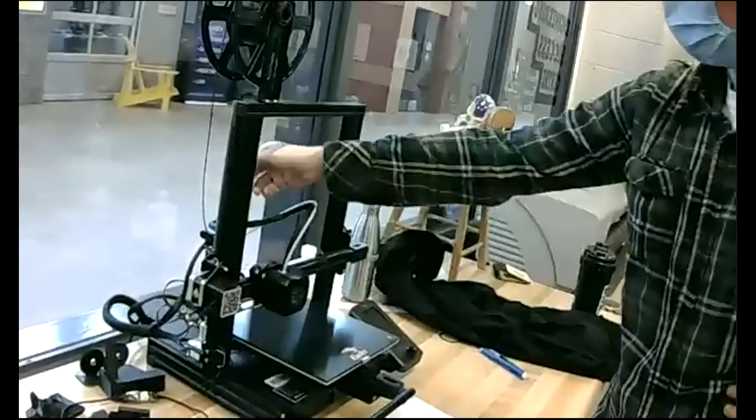You have your X, Z, and Y motors in back, and then you have your extruder motor, which just does nothing but push filament through this piece here, which gets hot, the little nozzle at the end. That's the main breakdown of the printer, really. Besides, this is your print surface. This is where everything will start, and it needs to be particularly clean.

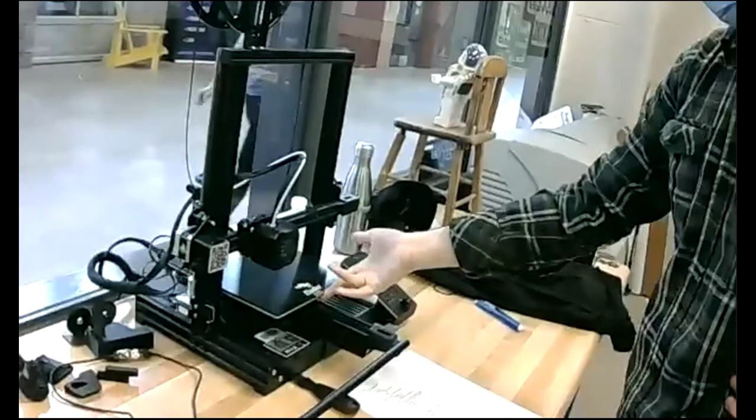So you can't do this. Don't do that, because any grease or any dirt that gets on that bed will basically make your prints not adhere to it and make it really hard to do anything. Your printer has 2 methods of inputting data onto it. You can either use a small SD card or USB to put data onto the printer, so you can put your files on it, print them.

And I guess from there we'll go into how to start it up. On the back of this printer, you have your main power switch right near the power cable. And I'm gonna show this here. Then you have your control right here. This is basically the only information the printer will provide you, and it only has 1 dial and a button.

In here you have your 4 main options: print, prepare, control, and info. Info just tells you the current model of the printer, the firmware, everything like that. Control allows you to specifically adjust the heat of the bed, the heat of the nozzle, how fast the extruder is extruding, all of the really fine-tuned stuff that you generally don't have to worry about.

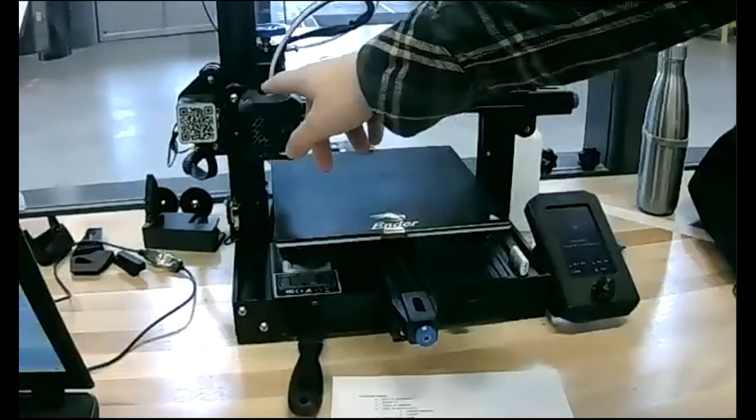And prepare allows you to do things like disable the steppers, digitally move all of the pieces, so you can move it forwards in the Y or in the X or Z. You can auto home the printer, which will bring all of the components to their limit switches. Both X, Y, and Z all have small limit switches here, which basically define the outside of the bed. So it won't attempt to print outside of hitting those limit switches and a certain distance from them.

Now, you can also do your preheating for different plastics here, your cool downs. You'll need to do that for adding or removing filament, and I'll show you how to do that soon. Down here, there is your current temperature, 21 degrees Celsius, just room temperature, which is followed by your target temperature, which is where it is trying to reach. That is both for the nozzle and for the bed.

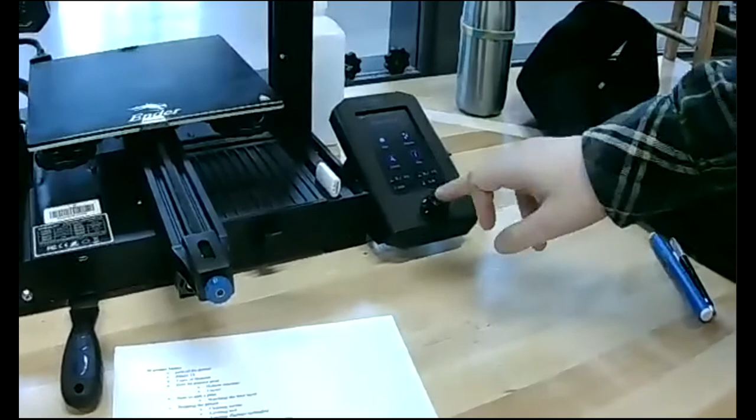You have your current speed. You can turn the speed up and down, and the Z offset. So sometimes you may want it to start printing at a certain offset if you're continuing a print or something like that. In terms of turning a print on to start a print after you've done all of the modeling and slicing, it's as easy as just selecting print, choosing whichever file you have from your SD card or USB, and hitting start. After that, it will start printing, and all you have to do is watch it to make sure it's not going to fail.

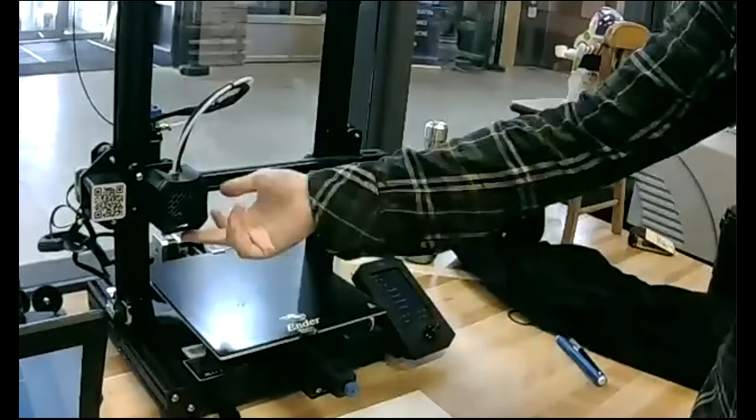So your main issues you're going to run into when printing something, the main issue in general is it's not going to adhere to the bed, which means it's going to attempt to extrude plastic from this tiny nozzle here as close to this bed as possible, and it's just going to not stick. It's going to slosh around. You're going to end up with a whole bunch of just wasted plastic all over the place, and it's a fire hazard. So that's caused by mostly two issues. One is your bed is dirty because you've been touching it, or it's not level.

So down here, you have these little wheels. There's one on each corner, and they are connected to springs. Those are used to level the bed, so you can turn one of these up or down, and it will adjust the angle and canter of the bed.

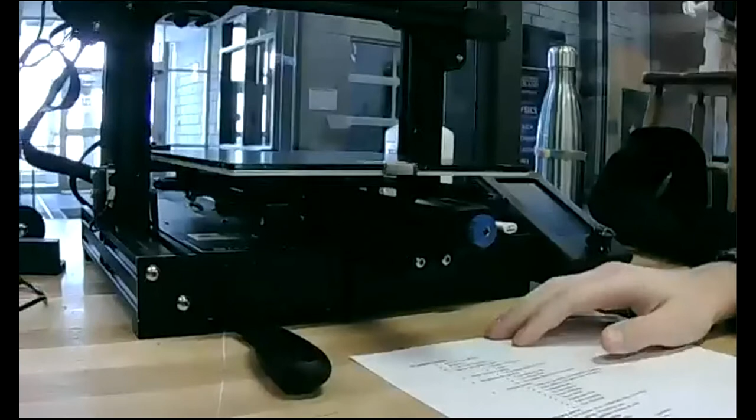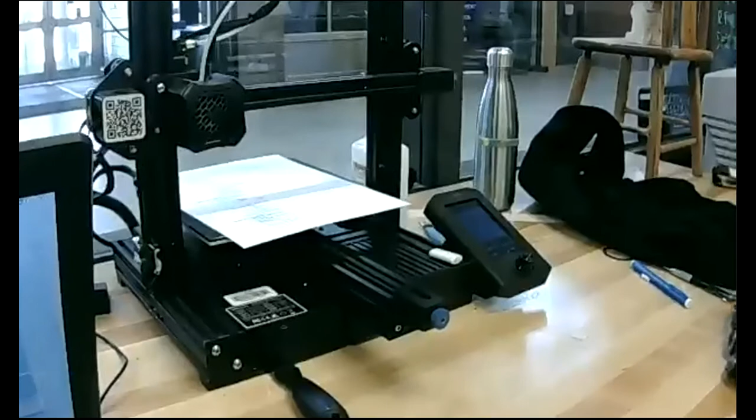And that will allow you to line it up so it's as flat of a surface as possible, because you can't align your nozzle. That's always going to be in the plane it is. You have to make sure that this is aligned to it and as close as possible. Generally, the best method of doing that is to put a piece of paper on your bed, auto home your printer, which takes a second.

From there, you can disable your stepper motors, and this is the position where your nozzle is going to be as close to the bed as possible. It's going to be your start position. And when the piece of paper is between the nozzle and the bed, you should be able to move the piece of paper around with a small amount of resistance from the nozzle.

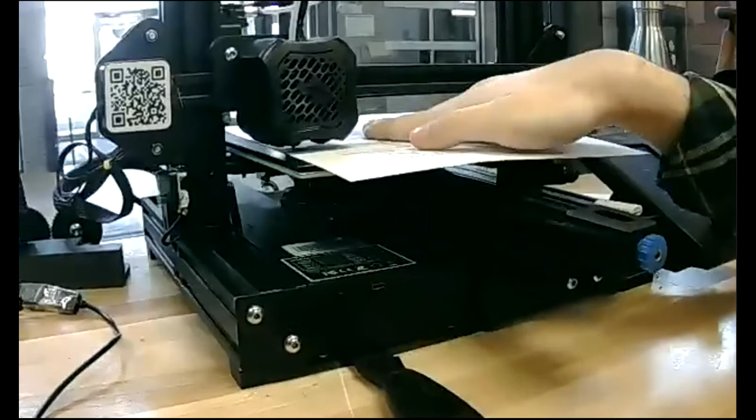So basically, you're going to have about the thickness of a piece of paper between the nozzle and the bed. And you're going to do that for every corner and the center. And as you go around, you're going to find that there's certain spots that are too loose or too tight, and you'll adjust each wheel accordingly to make sure it is the correct, just a little bit of resistance.

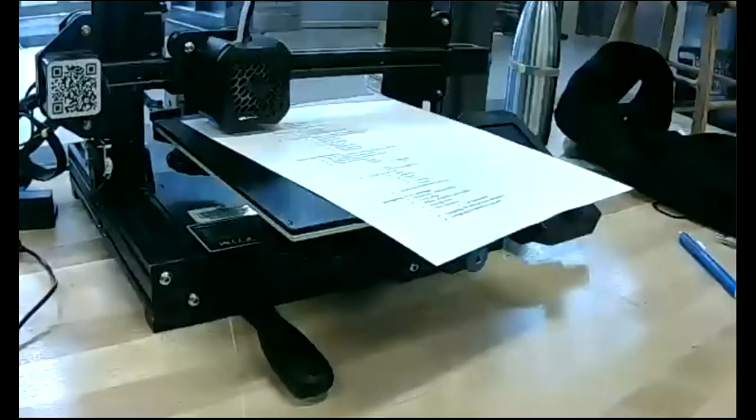And you'll have a level printer. When you can go around, and there's even resistance around each corner and the center, your bed's leveled. Beds will occasionally come mildly warped, which means they won't be perfectly flat, and it will be impossible to perfectly level them. And that's just something you have to work around when you're laying out your prints on the bed. That's a software thing, so we'll cover that a little bit.

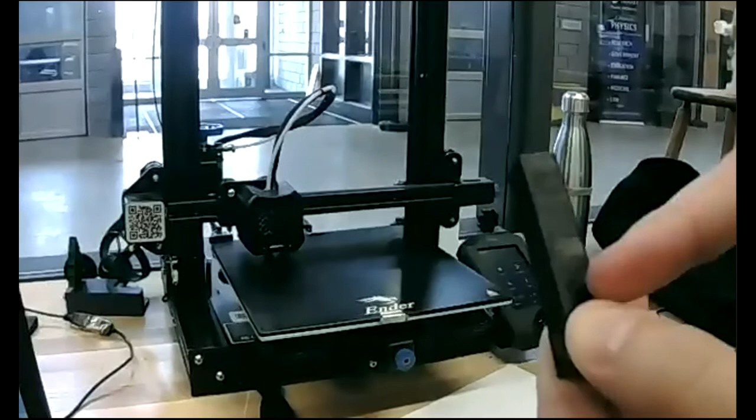In terms of how it actually prints objects, a printer prints in layers. So it starts at one layer, finishes that, moves up very slightly, prints another layer on top of it, and you end up, I don't know if it will show this very well, but there are lines all up and down your print. So because it prints like that,

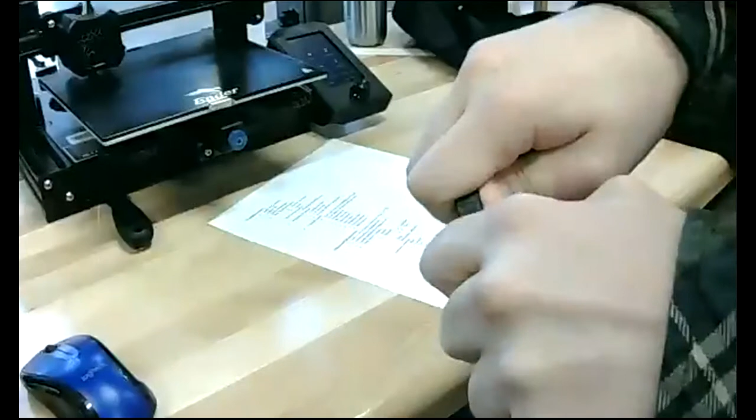your Z-axis is your most delicate axis. It means it's the easiest way something's going to break. It's all your weak points. So if you have something that's printed very tall, it'll be easy to kind of snap in two. This one's too thick. But if you print something that's very short, so I printed these in two different orientations, one printing up and one kind of on its side.

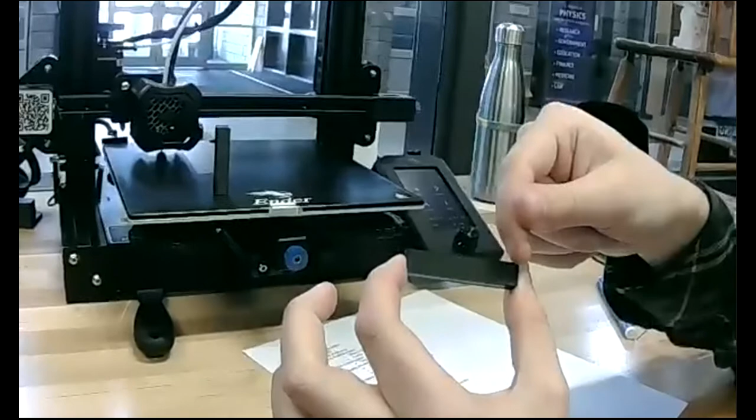This one here has its layer lines going this way, but they are much longer, so it's much stronger. It's less likely it's going to snap into pieces, whereas this here was printed straight up, and that means it's the weakest point. It's snapped off right along those lines, and it ends up being a reasonably clean snap off.

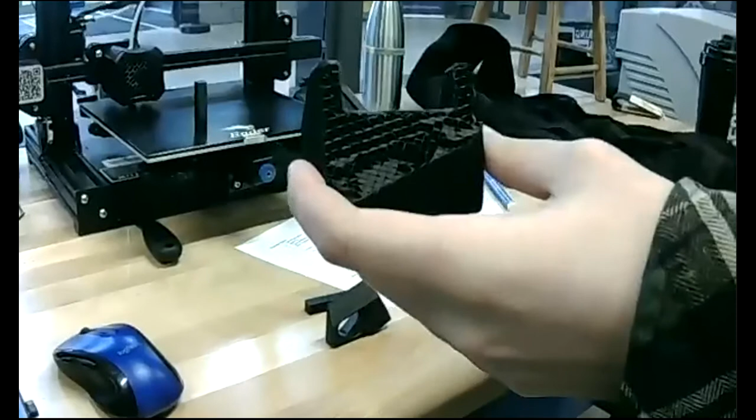The prints are also generally hollow with an infill, which means that they have this strange kind of grid inside of them. Them being hollow makes them mildly weaker, but it also saves a lot of time and filament because it takes a really long time to print things, especially if they're completely solid plastic. And I think that's most of the printer overall.

Jared, would you say that there's anything I missed going over the physical aspects of the printer? No, didn't really notice anything. I'm also playing with mine right now, so.

So I think the next thing I'll probably go over is how to design something for 3D printing and the things you have to take into consideration. So I'm going to share my screen and share my SolidWorks. So is everybody able to see this okay? Yep. Awesome. So this is just a random part, a CSWA practice part.

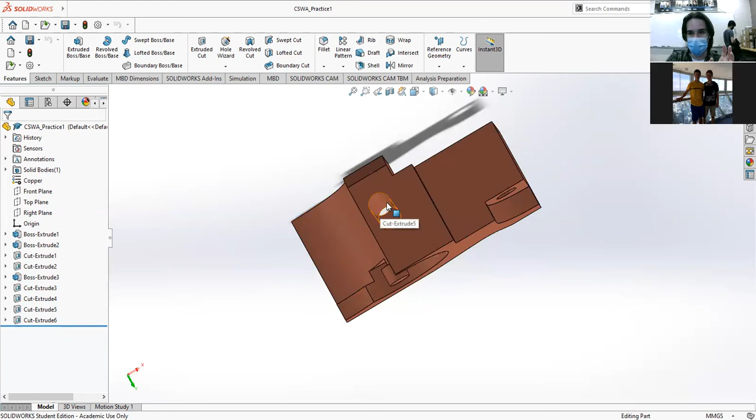And if we wanted to 3D print this, there's a few considerations that need to be taken into account. The first one, if we were designing this from scratch, is what is used for what, in terms of, does this hole exist as just a hole for looks? Is there going to be a rod going through this that it has to spin on? Is it going to be something that's screwed into? What is the purpose of that actual hole?

Say like this little piece that's popping out here, is that going to be holding any weight? Does it need to fit onto something? Because with anything that needs to interact with another part, be it 3D printed or a bolt or anything else, you need to take into account the tolerance of the printer.

Because when the 3D printer, say, follows this curve, it is following this curve exactly with its nozzle, which means it is essentially following a 2D line. To the 3D printer, this line is essentially zero thickness. But when it prints, it is not zero thickness. It is printing out at whatever your nozzle width is, the standard nozzle width being 0.4 millimeters. So very small, but really noticeable depending on what you're doing.

So as it prints along this line, it's going to put the center of the nozzle on that line, and it's going to squeeze. It's going to have a 0.4 millimeter line there. So approximately 0.2 millimeters is going to be on this side, 0.2 millimeters is going to be on this side. So this hole is actually going to be slightly small. And that goes for basically every line on here. It's either going to make everything slightly small or slightly bigger.

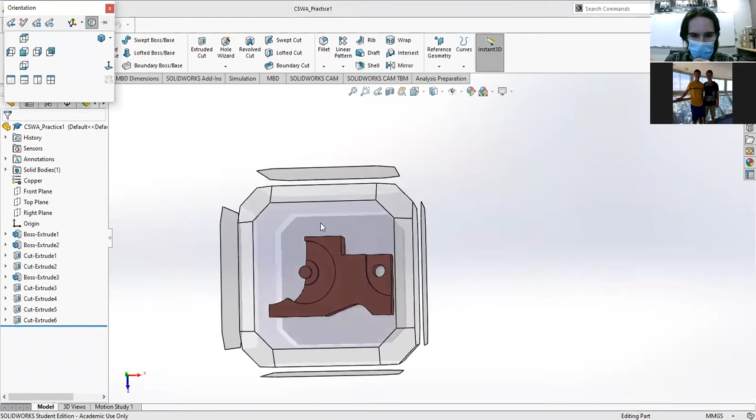You also have to take into account the way that the printer prints in layers, because as it's printing up in layers, it's going to have a maximum resolution. So when it comes to curves, it can't make a perfectly smooth curve. It has to make a bunch of layers stacked on top of each other. Instead of ending up with a nice smooth curve, this will be your first layer, that'll be your second layer, that'll be your next layer, that'll be your next layer. And you end up with steps,

which generally isn't too bad unless you're doing something like a through hole that needs to have a pin go through it so it can rotate. Because then your through hole isn't going to be round. It's going to be almost an oval, because if we started off like this, it's making it semi-round. And then your top and bottom are always the largest parts, and they're always flat. So you end up with kind of an oval shape.

So you have to take into account that any holes you print sideways, if you were to print it in exactly this orientation, that's not going to be a perfectly round hole, and you're not going to be able to perfectly fit something through that. And you can account for that by making it slightly larger, changing the shape of the hole very slightly, or you can account for that in print orientation, which we'll go through in a second.

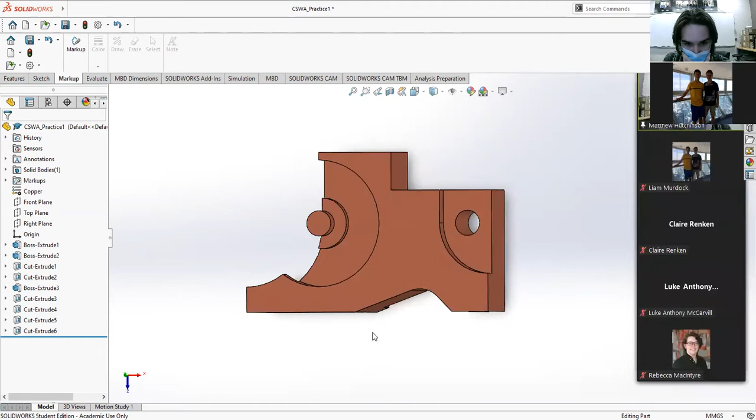Another big one, much like with the different little squares I showed where you have the layer lines, you have to think about how it's going to be taking force and what could snap off the easiest and orientate it that way. So if this little round thing here had to have force applied to it, something hung off of it, I wouldn't want to print it like this, because then the layer lines are going to be running across it and it's just going to snap right off the main body of the thing. I want to print it like this so that the layer lines run this way and they are kind of parallel to the force.

You also have to take into account the printer can't print on thin air, so it has a limit to what it can print overhanging air. So the general rule of thumb is if you are printing an angle like this that goes up, you want it to be a 45-degree angle, because the printer can make a 45-degree angle and just climb straight up, no problem.

An angle like this, it's probably going to have issues because as it comes through it, it makes this. It's going to start off and then it's going to start trying to go further and further out. And then this area here is just hanging over thin air and it's just going to droop down and it's going to be a really uneven surface.

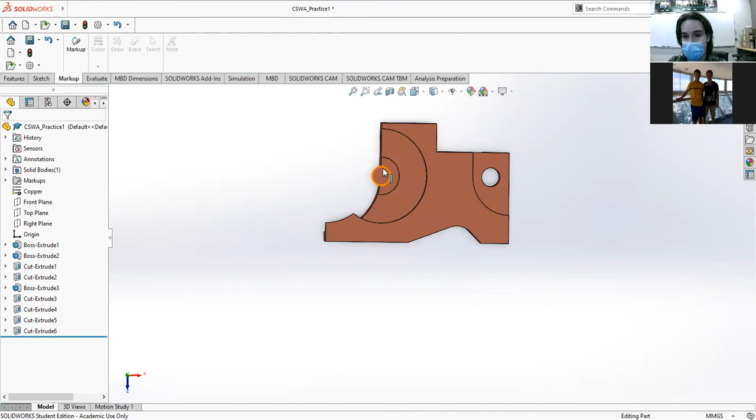So when you're designing anything, before you start designing, if you're planning on 3D printing it, you have to think about what is going to be having a force applied to it, what has to interact with other physical objects, especially if they're other 3D printed objects, because then you have to take into account the fact that the layer lines could be rubbing together, and that's going to cause quite a bit of friction.

And you have to think about the overall orientation to make sure that none of your curves are going to be impossible to print, or you don't have any overhangs, so you don't have something that would stick out right here with nothing underneath it, because then the printer is going to be here and then try and just print over thin air and then stop midair, and it's just gonna all fall down.

One last thing you have to do is basically designing to overcome one of the downfalls of 3D printing and the bed. In order to stick to the bed, the 3D printer purposely makes the nozzle slightly closer to the bed than it should be. So it takes the thickness of the piece of paper we used and it cuts that down a little bit so that it gets a really good squish against the bed of the printer. But what that does is when it squishes more, that 0.4 millimeter extrusion that I mentioned earlier ends up becoming slightly wider.

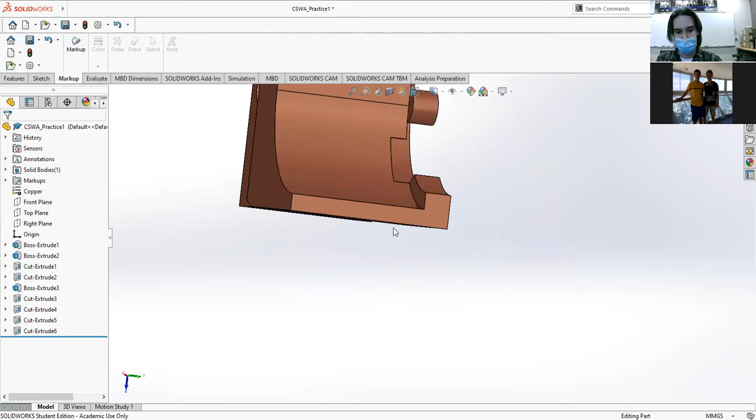And what that does is at the bottom of your print, your bottom, instead of being exactly where it is, it's going to look a little bit like this. And it's going to kind of stick out a little bit more because those bottom layers were squished a bit more than they should have been. And that's called elephant's foot, is when it makes it kind of extrude too much on the bottom.

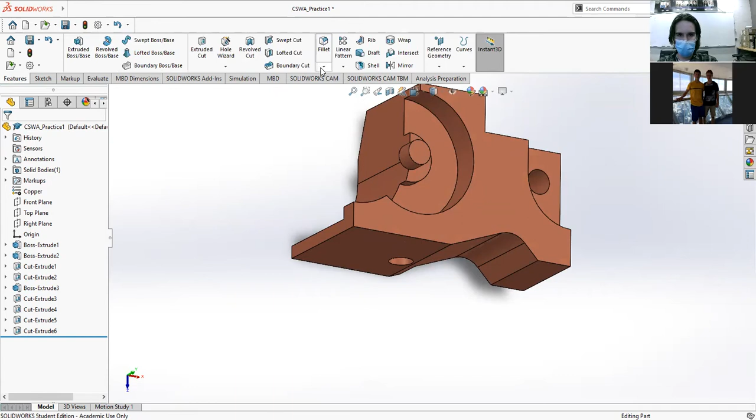And it's annoying and it makes for weirdly sharp edges, but it's really easy to fix because after you've planned your print, you know what orientation you're going to print it in, you know that none of the angles are going to be impossible to print. You can add a chamfer to your bottom edges, and they just need to be 1/2 millimeter.

If you can add a 1/2 millimeter chamfer to each bottom edge, that will generally get rid of any elephant's foot, any extra squish that's going to be there, and it's going to make it a lot nicer for you to print it. Means you're not going to have to worry about sanding down the edges or anything like that.

One thing to note when it comes to needing to print over angles that the printer can't do by itself, or printing overhangs like I talked before, you can add support when you're slicing the print, and I'll show that in a second. Support is basically extra material that the printer will put in place so that anywhere that it would be printing over thin air, it's now printing over this extra support material that's meant to be taken off later.

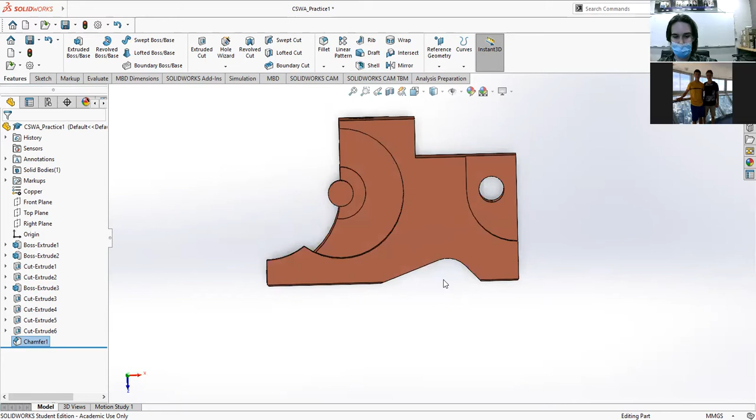So if we were to print this in this orientation, it would automatically place support all through this area, as well as in this hole, underneath this, and entirely under here, up to probably this point. So all of that would end up being support material, all of which you need to rip out and cut out after you finish your print as post-processing. And it's not nice, and it leaves generally really ugly marks on your prints.

So while sometimes necessary in order to print something, if you can design your item to require the least amount of support material possible, that is always the best case, even if that means, can't erase that now, adding just a bunch of extra chamfers around so that where it has to go up and over, it's now going kind of at an angle, a 45-degree angle where it can do that.

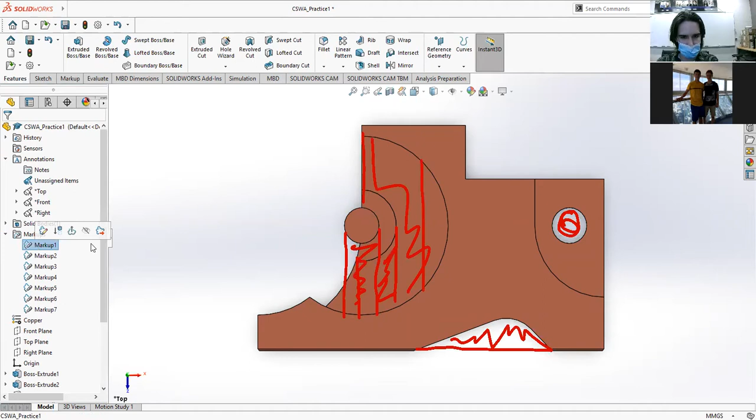There's also, I don't have a good way of showing it on this, but depending on the printer, you also have the option to do something called bridging, which essentially goes against what I was saying about printing on thin air.

So if you're printing, say, a house, and you have two walls on either side, you need to print across this area, but this is a closed house, so you can't have support material inside because you'll never get the support material out.

Depending on how tuned the printer is, how well set up the printer is, the type of plastic you have, the temperature of the plastic, and a lot of other factors, you can actually stretch the plastic from its starting point here and stretch it across here almost perfectly straight. And you'll end up being able to kind of bridge the gap and create a solid surface across it without needing support underneath. In my experience, it's generally safe to get about 2 centimeters of bridging.

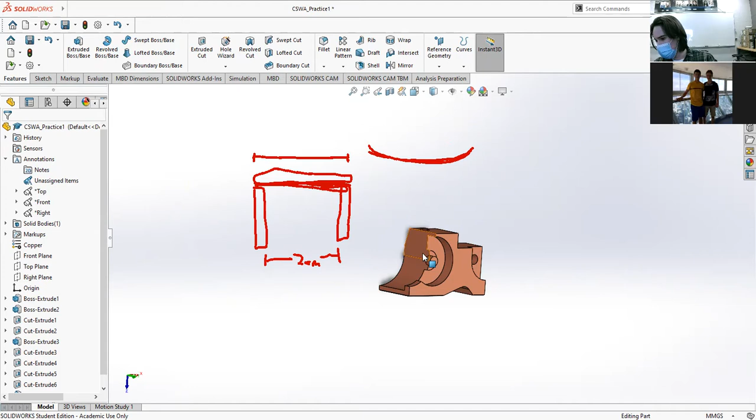So 3D printers obviously aren't very large. The one we're using has a bed size in X and Y of 220 millimeters by 220 millimeters approximately. So you have about 22 centimeters of play. So if you are designing something that needs to be larger than that, you need to split your designs, because you're not going to be able to physically print it generally, unless you want to print it in a weird orientation that may make it a lot harder. So be careful when you're designing anything that needs to be printed larger.

I found a good method is to design it as the full piece, use the SolidWorks intersect tool, and then add fins or tabs or something small where they can be slotted together. And then, after the two pieces are printed, you can slot them together with some glue, and you'll usually have a pretty sturdy piece.

Does anybody have any questions about modeling for 3D printing before we start talking about slicing 3D prints? Yeah, I have a question. So you said that the nozzle is about, did you say 0.4 millimeters? Yes. Okay, and do you ever use different size nozzles, or is that very standard? 0.4 is the standard. Any printer you buy generally will come with a 0.4 on it. It's the most often used because it's easiest.

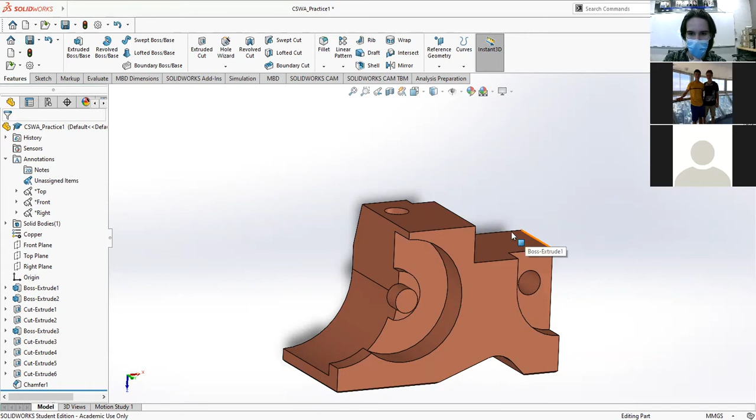And so how does that relate to the diameter of the actual filament that you need to buy, if at all? What do you mean, sorry? Like do you need to buy a specific diameter filament for your nozzle? Like 1.75 versus 2.85, I think is what he's asking. Yeah, depending on how large you get and the hot end you're using, you may have to get a thicker gauge of filament. I think once you get over a millimeter, you do have to move into the 2.85 diameter filament. Okay. So what would be the diameter of the filament you're using now? 1.75. Okay. And so the nozzle reduces that diameter.

Does thermal expansion play any role in terms of shrinking after it cools down? Yes, actually, that's an issue I met with pretty seriously last summer during one of my projects. It's really noticeable when you're doing large prints, very wide prints that are not very thick. Okay. And what happens is, say you're printing a square the entire size of the bed.

As it prints, the center of the bed is generally the warmest part, where the outside is slightly cooler. And because of that, the edges of the bed being slightly cooler, that plastic cools slightly more than the inside, so it contracts slightly, and that leads to curling on the edges of your print. And you'll see them sometimes lift off on the corners or on the sides of the print and just completely come undone.

With those, you generally have to find a method to keep the printer hotter. Usually that's done with an enclosure, and it'll keep a more even heat distribution along the bed. Or you can use adhesives to keep it on the bed. A lot of people use hairspray. You can use stick glue, stuff like that, to kind of counteract the curling.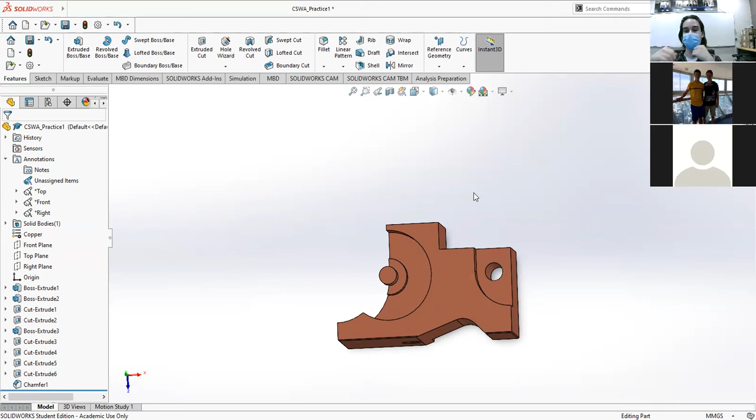Okay. Let's say though that you're literally just extruding a single one-dimensional line. What would be the diameter of the line? Then it would be 0.4 millimeters, or whatever the width of your nozzle is. Okay, cool. All right, thank you. You can continue. Anyone else have any questions about designing things so that they can be 3D printed?

I have a quick question. I know we have more 3D printers located in the FSD, some of them are Ender 3s and stuff, but what differentiates those from the one we have in the Success Center, and why would you use those for design alternatively? Sorry, I couldn't hear that one super well. Were you asking about the difference between the Success Center 3D printers and some of the other printers in the building? Yeah, and how it would impact your design. Yeah, good question. It depends.

Some of the nicer standard printers we have could be running with upgraded hot ends or updated motherboards, which allow them to supply more power and get hotter. And that would allow them to print in different kinds of plastic, like ABS, nylon, stuff like that. And that just changes the material properties of what you're printing. The basic design considerations stay basically exactly the same.

With a few changes, say, I think ABS doesn't bridge quite as well from what I remember, and it is more prone to curling. So you do have to take into consideration what kind of plastic you use, but one of the big things with some of the better printers we have is just more options in terms of your materials.

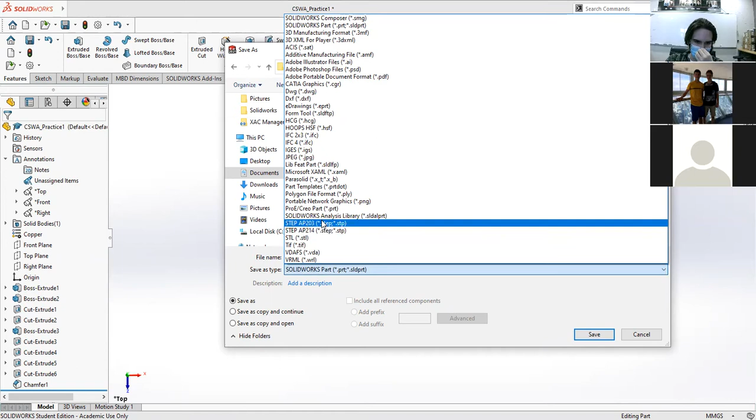The first step to that is to save your model as a more standardized file. So for that, we're going to just save as, and I'm gonna save it as CSWA practice 1, and you're gonna want to save it as an STL. There's a few other files that work. I think STEP works as well, but STL is the standard for 3D printing files. And save, and this will just basically convert it from a SolidWorks part to just straight geometry.

Now I have to adjust my screen share. One sec.

So the slicing program I'm going to go over is called Ultimaker Cura. It's a free open source slicer software made by the company Ultimaker, who makes 3D printers. And it is a pretty great software. It's a little difficult to get used to. There's a lot of options, but everything that you need is basically there right off the bat.

And it has methods of turning down its intensity. You can set it to beginner mode. You just give it a file, just say, yes, I want supports, no, I don't want supports, and it'll just give you something to put on the printer. But we'll go over some of the methods you can use to enhance your prints, just alter them to make sure that they're going to be as good as possible. One second as it loads.

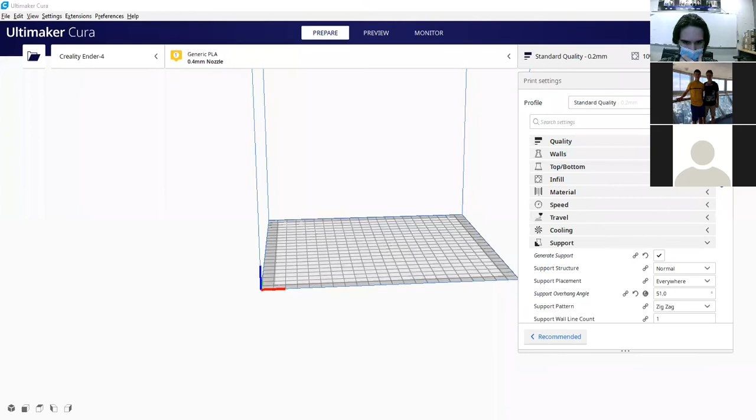Okay, so this is Ultimaker. So right now, I just have a custom setup. It's called a Creality Ender 4. Technically, we're using an Ender 3 V2. So you can set that to just Ender 3 or Ender 3 Pro, and it'll use all the correct settings.

It scales the bed to be the same size as the physical print bed, as well as giving it this little grayed out area, which is adjustable, but it's kind of like a safety space. It says, even though the bed is this wide, don't print in those gray areas just in case it runs into something.

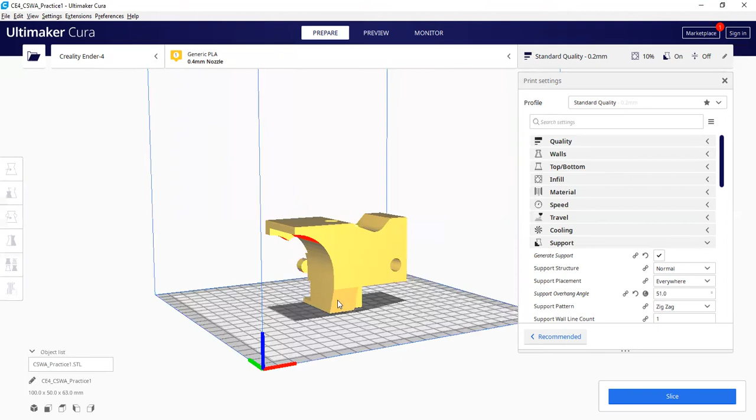So once we get Cura open, it's as easy as selecting a file to open up in the corner and opening the STL you made earlier. And it loads it into its little Cura space here. I find it usually loads it in weird positions.

Like this would be a terrible way of printing this, because you can see the blue parts are what is on the print bed, and any part that is red requires support material. So right now, basically the entire thing needs support material. Very little of it is on the print surface. That's not good.

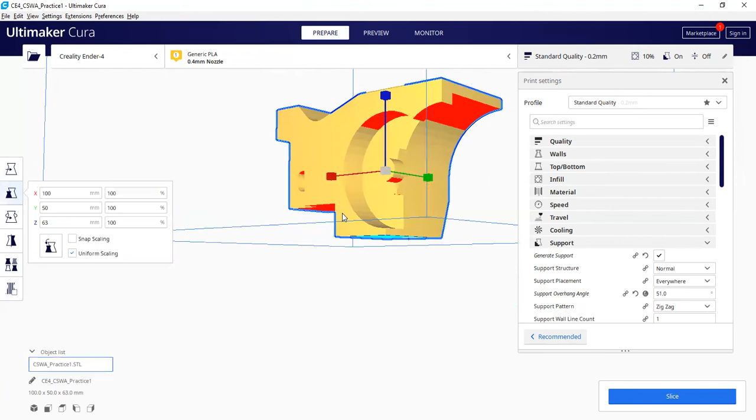So if you click it, you can go on the sides. It gives you an option for translating it, resizing it, either uniform or non-uniform, so you can make it really long, really wide. And you can rotate it about any axis, as well as a few extra nice features like align face with build plate, lay it flat, reset it.

You can mirror things. You can change some settings for different models, because you can give it multiple pieces at once and have multiple things to print. Cura will almost always have this default to a 0.4 millimeter nozzle with a generic PLA plastic. That is exactly the settings you want, unless for some reason that's been changed.

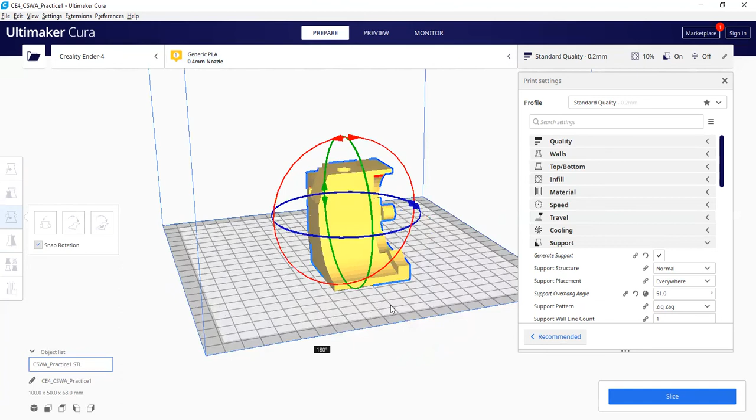So what we're gonna do is we're gonna briefly rotate this into the position we talked about earlier, where it's easiest to print and where we're happy with it. So you can see there's red here, red inside this hole, some red there.

So right now we could hit slice and it will break this down into G-code, which is essentially coordinate code that the printer reads and moves to. It'll say extrude this much at this location, then move to that location. And if it was to be printed, this is what it would look like. Your red being walls, yellow being top surfaces, and this kind of blue being your support material.

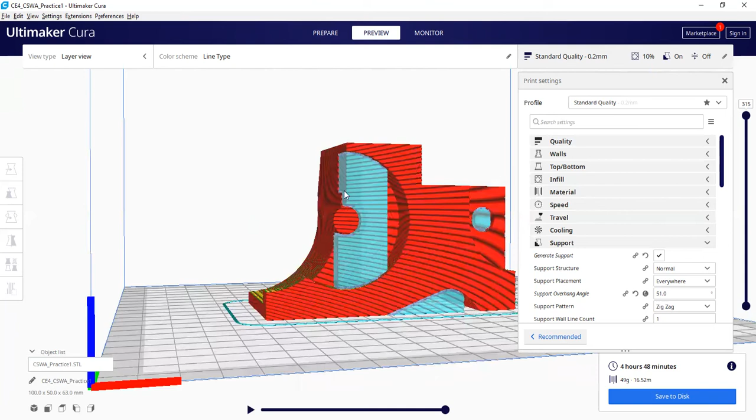So we just have standard supports turned on, and you can actually on the side pull it down and see how it would print it at every layer, down to watching the nozzle actually move through the entire print. And here you can really see the hollow structure.

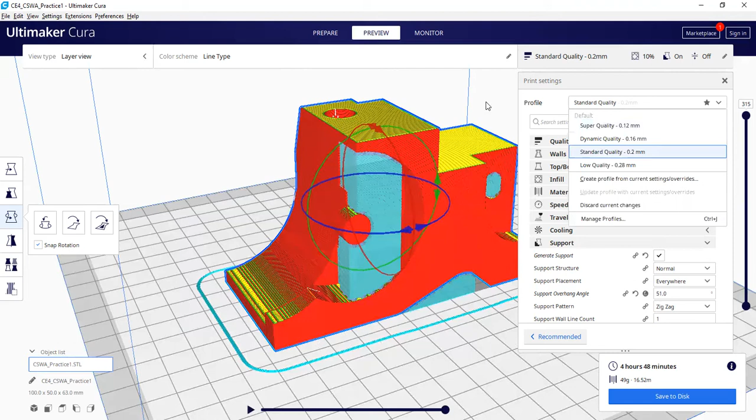So let's say this is going to be, we'll start off with some, oh crap, no, cancel. Let's start off with some basic settings.

So on the side, right here, you can open up your print settings, and this little 3-bar line will let you choose how advanced you want your settings to be. Be them extremely basic, you want to be able to just chuck it on here, slice it, print it, done. To expert, where you might have certain walls, or you might be taking extra torsion or something, so you make the walls thicker, you may have more infill, stuff like that. And all of these little things are changed.

All these little drop downs are things you can change from your quality, which is generally measured in layer height, which is the space between the actual physical layers. Your walls, which is how thick your walls are, how many lines there are. Those are generally related. So if you say there's 3 lines, it's going to adjust the wall thickness automatically because the walls are going to be 0.4 millimeters thick.

And then horizontal expansion, so you can make things a little bigger, compensate for some stuff. You have top and bottom thickness, the number of layers that exist on the top and bottom before it starts printing infill. The main one is infill itself, which is your infill density.

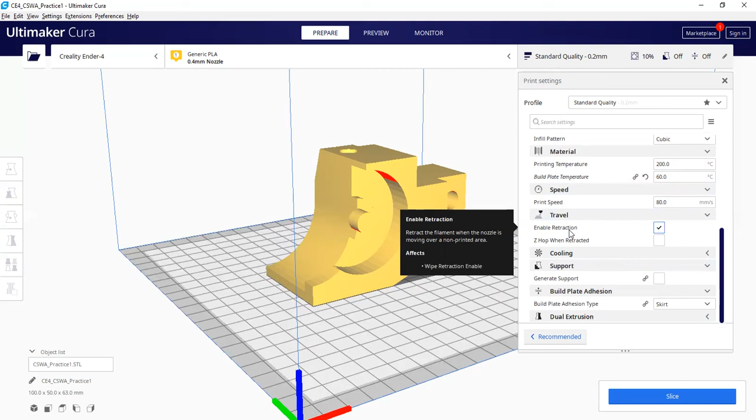Travel is an interesting section because, I guess the best way to put this is the nozzle is constantly under pressure, which makes sense because we are forcing 1.75 millimeter filament through a 0.4 millimeter hole. So because it's constantly under pressure, we can play with traveling settings, which basically say, as you're going along a wall, when you get to 3/4 of the way through the wall, stop pushing filament through it. Just let the existing pressure in the nozzle extrude the filament left in the nozzle.

And that will prevent you from putting too much plastic down when you're traveling in a straight line or coming towards a corner. Because if you don't reduce that pressure, you can end up with large blobs of plastic where you shouldn't have any. So that's kind of your traveling settings.

Retraction will actually go a step further. And along with just stopping pushing more filament out when it gets to a certain point, it will pull some filament back and reduce even more pressure. And that means you don't have to travel for as long, which saves you a little bit of potential for error, but does slow down the print a little bit.

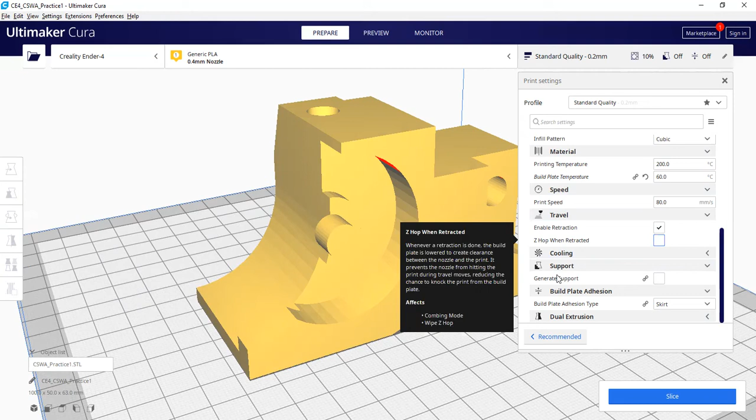Z-hopping when retracting just increases the height very slightly in order to create a tolerance between the nozzle and the print in case there's any stringing or anything like that. I find it doesn't do a whole lot. It doesn't help very much for what I've been printing.

For cooling, obviously the plastic needs to cool. That's actually a part I didn't show on the physical printer: there is actually a fan pushing air directly below the nozzle where it's extruding the plastic, so that the moment the plastic hits what's underneath it, it is cooled off and hardened. So you can turn fan speeds up or down depending on if you need it to print extra hot for some reason.

And then you have generate support, which in your basic settings is just, you turn it on, you say place supports everywhere, and then you set your overhang angle. So that is where I said the printer can generally print 45 degrees perfectly fine. Almost any printer can do this. So your support angle will start off at 45 degrees.

So that means anything at 45 degrees will print with support. You can change that to 46 degrees, and anything at a 45-degree angle no longer needs support. And you can see how that adjusts it as I change it. So that's everything with a 4-degree angle. Everything over a 4-degree angle needs support.

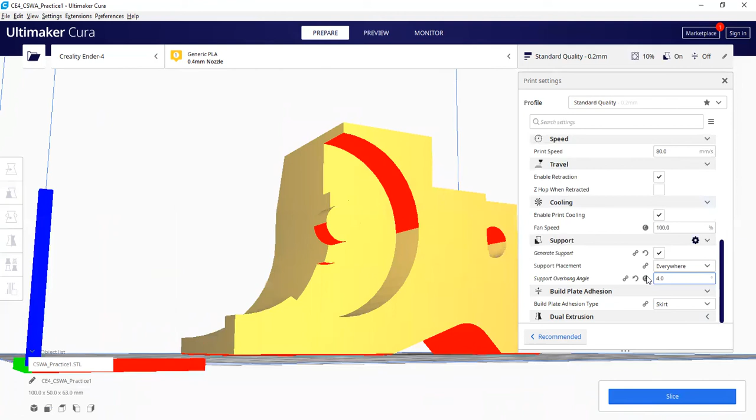That would be terrible. A lot of printers can push it. A lot of printers can go up to say like 60 degrees or something like that, but 45, or technically in this case 46, is your best support overhang angle, just to be safe.

You can choose whether support to place everywhere or only touching the base plate. So if it's only touching the base plate, it means it will only be here. Like it will only be under here. All of this stuff won't have support, because directly underneath it is more like another piece of the print. That's useful in some cases.

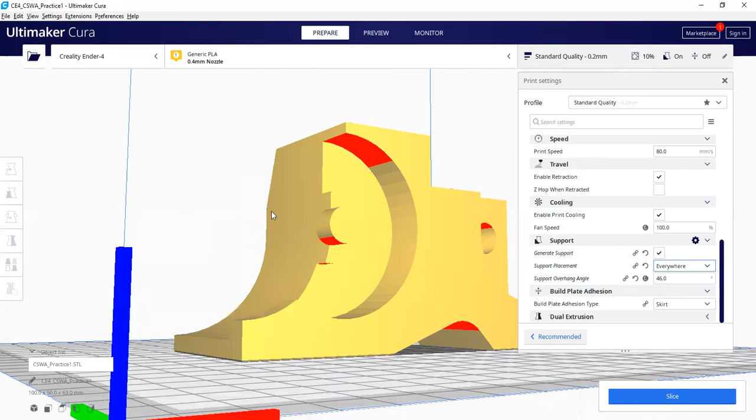Build plate adhesion is a big one, and something to really take into consideration with the size of your print. So this is currently set to skirt, so you'll see when I slice this, it'll take a second, and preview. It generates this little skirt of plastic around it. That is the first thing that's printed. What that essentially does is preps the nozzle.

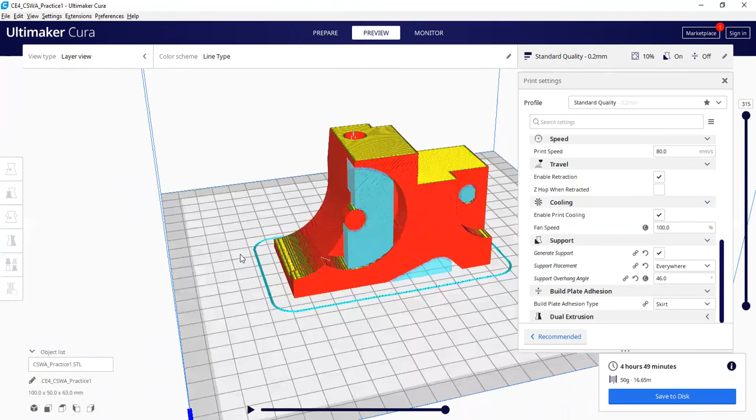The printer will always print a little purge line on the side just to make sure that the nozzle isn't clogged, but this will run before it starts printing anything inside. It's just going to make sure that the printer is hot enough, there's plastic easily flowing through it, and everything is ready to go.

And it has the added bonus of you can sit and watch it print the skirt, and the moment you see that the skirt is pulling off the bed, or there's a large blob on it, or it's not extruding enough, you can just cancel it before it starts printing anything else and say something's wrong, got to fix it. Need to clean the bed, need to level the bed, need to unclog the printer, need to adjust the print for some reason, change temperatures.

But occasionally you'll get to prints that are difficult because they have very little contact with this base plate. So you may have something that's standing up on legs or something like that, or is just very small. A general rule of thumb is if a piece of a print has a contact patch with the base plate of less than 5 millimeters, even 5 millimeters is a little iffy, but anything less than that, it's not going to stick.

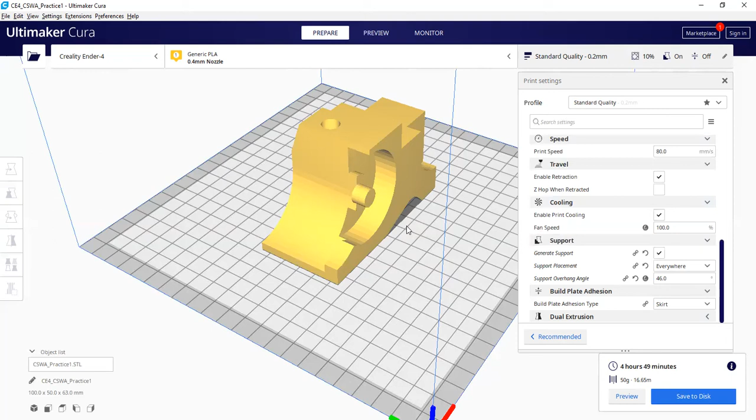It might stick down for the first couple layers, but as it gets higher, there's going to be more force applied to it, and there's not enough surface area on the bottom touching the base plate for it to stick without falling over. So when that's the case, you can add a brim. So what a brim does is it forces there to be a larger surface area where the print touches the bed. So if you have anything that has a small contact surface to the print bed, add a brim to it, and that will ensure that it doesn't just fall over halfway through the print or 7 hours into the print.

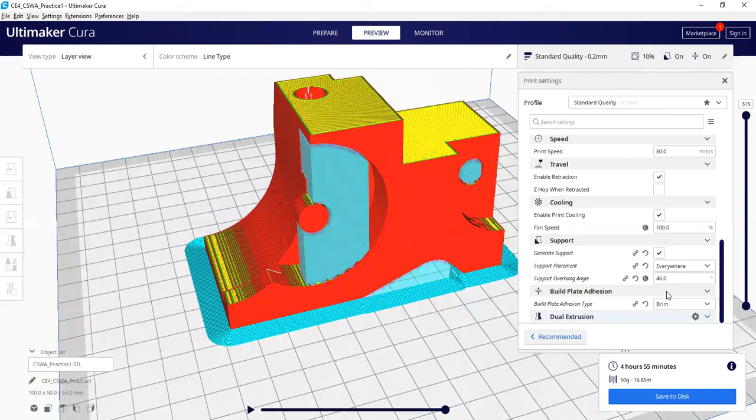Dual extrusion really isn't something that we worry about here in the Success Center. We don't have the options for that. But like I said, some of the larger printers in the school do have multiple extruders on them. They can do multiple kinds of plastic.

And it is important to note that 3D printing takes a long time, like a lot longer than you ever want it to. So this would take almost 5 hours to print at standard quality. If you wanted this to be a really high quality print, you wanted it to look really nice, let's see how long this will take. Yeah, it's going to take almost 9 hours now. So it's important to take time into consideration when you're designing something and how large it is, because if you need to have it printed in a day and it is huge, it might take 2 full days to print it.

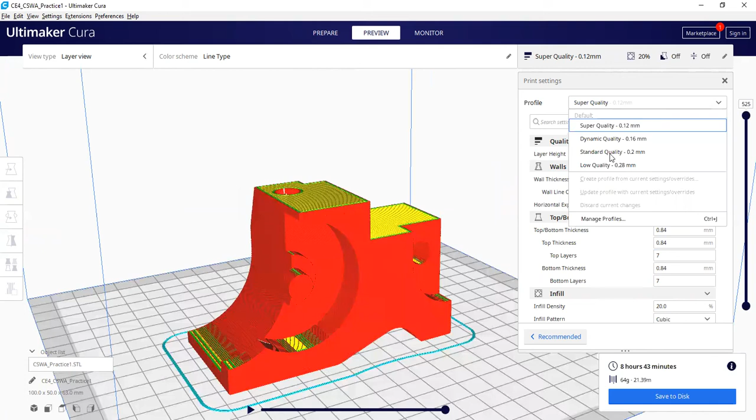When we get into some of the more advanced settings, we won't go much further than advanced settings. We'll just quickly go through these. There are a lot of extras that you can change. Initial layer heights, so you can make it squish more to the base plate. Like when I said earlier that it prints the first layer slightly smaller than it should be, you can make that even smaller or even larger if you want. That is a way of reducing elephant's foot without adding chamfers, but will reduce the chance of it fully sticking to the base plate.

You have line width, which you can change. That's like I said, where if you printed a one-dimensional line, it would be 0.4 millimeters. This generally has to be the same as your nozzle size. Wall line width, same idea. Top line width, same idea. You have your wall thickness again. You can optimize wall printing order so places that don't need as many walls won't have as many walls. Fill gaps between walls, kind of self-explanatory. Your top and bottom layers, you can add or subtract layers, change thickness.

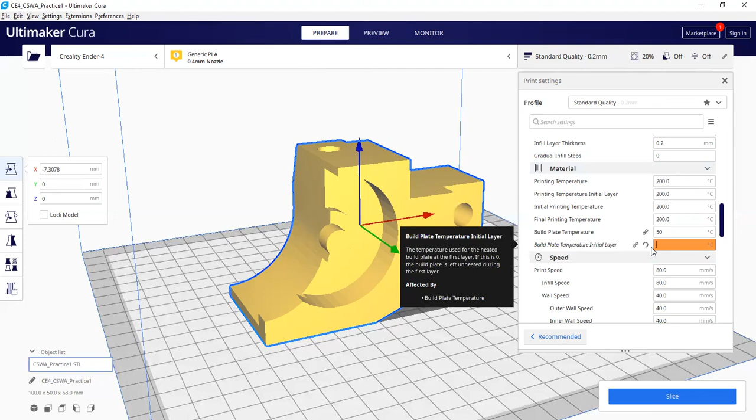Printing temperature, you can actually set the printing temperature initial layer. It does that for the build plate initial layer too, so that is the first layer. You may find that you're having trouble sticking a print to the surface for whatever reason, but that's the only layer that's having troubles. You can increase, say, your build plate temperature initial layer to 75, and that's just going to make it hotter on the first layer. It's going to stick down a little bit nicer. Final printing temperature is just where the temperature should be when it's finishing, if you want it to start cooling down before it finishes printing for some reason.

You have more options with print speed as well. You can change the speed of individual parts. So you might want infill speed to be a little bit faster because nobody sees that; it doesn't matter if it messes up. And you might want wall speed a little bit slower because it needs to be perfect. So that kind of stuff. Travel speed, skirt and brim speed. You can turn on acceleration and jerk control, and that will kind of adjust for any issues in the printer when it comes to shaking or anything like that. Again, it mostly just slows down the print while adding a little bit more quality.

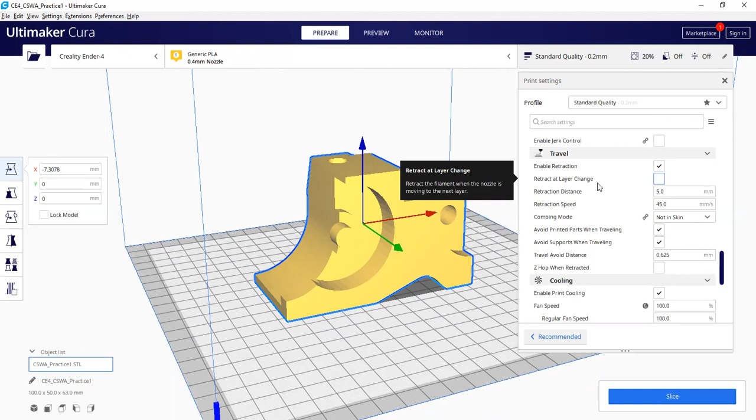With travel, you can retract at layer change, so that will pull filament back, reducing almost all of the pressure in the nozzle when it's changing. Again, that's going to reduce stringing. Stringing you'll find mostly in round holes. When it travels around, it will reach the end of the layer, then move to a different spot and leave a little bit of plastic along it, and you'll have little thin strings of plastic in the hole. It's a common thing. They just break away very easily. But if you retract at layer change, you can avoid stuff like that.

Retraction distance and retraction speed are sort of difficult to play with because you can do some math to find out the best distance and speed for what you're trying to do. You can do combing, which basically just, I don't even know. I've never played with that one.

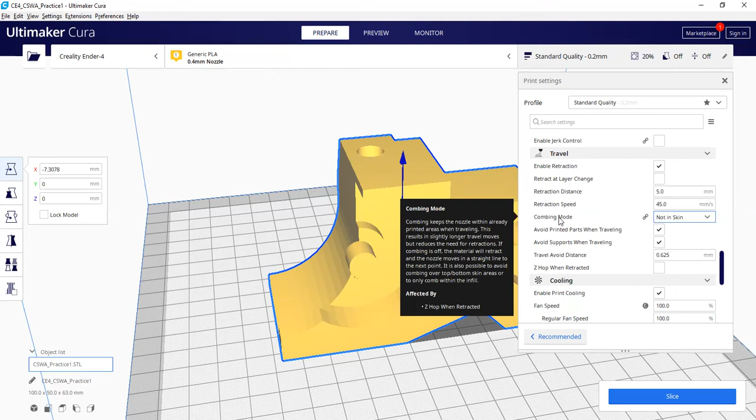Retracts when the nozzle moves in a straight line. Yeah. Avoid printed parts when traveling. You always want that on, obviously. This basically just says don't run into the part that's been printed so far. Support.

You can adjust fan speeds at different times. Again, if you want the prints to print hotter at certain points because you want it to either fuse better or stick to the bed better or anything like that.

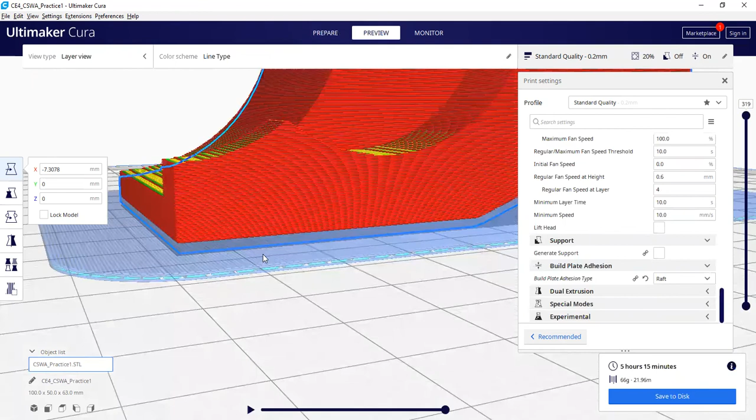Build plate adhesion, you still just have skirt brim. You can use a raft, which will, in cases where things really don't want to stick, you can print a raft which essentially prints not just one layer, but multiple layers underneath the print. And basically makes an artificial print surface underneath it. And that's really good for, again, things that really don't want to stick down, because the raft will stick down even if your model doesn't want to.

The downside is you do have essentially support material on the entire bottom of your prints, and it's going to be hard to remove, and it's going to lead to an ugly surface on the bottom of your print.

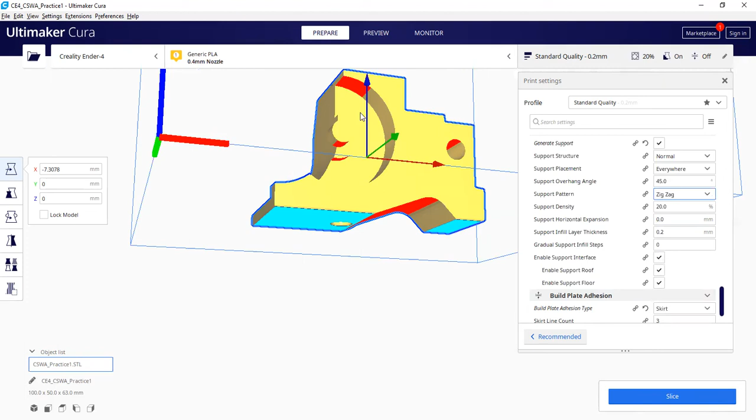You do also, with your support now, have a lot more options in advanced. You can use normal support structure, which will just build straight up underneath the surfaces that need support. You can change, again, placement, touching build plate or everywhere, angle, support pattern. It's kind of like the infill pattern where you can adjust it for different purposes. Support density, how dense you want that to be. If you want it to be higher density, it's probably going to support the print better, but it's going to be harder to remove.

Horizontal expansion, line thickness, and then there's roof and floor of the support. So the floor of the support will be what's on the bottom, and it will print a thicker piece, like a whole other piece of plastic, and then put the supports, and then it will put the roof of the support, and that's going to give you the best surface on the part of the print that's being supported. But it's going to be a lot harder to take off, because it's going to use a lot more plastic on supports.

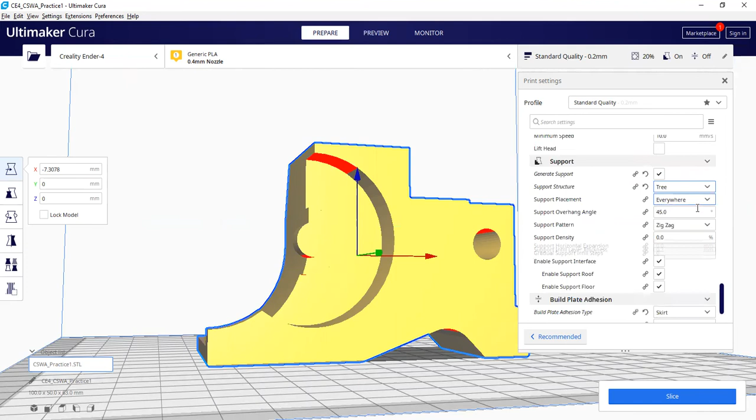And then my favorite is the tree support, which actually does some really fun stuff. I'll show you actually the normal first. So when we preview the normal support, you can see where it just builds straight up on what exists there already, or on the build plate. And if we change that to tree support, and let it load, it actually does some really fun math and figures out the best way to

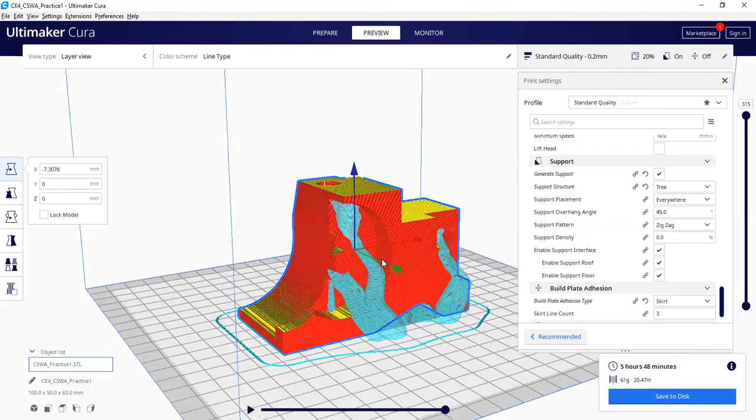But with tree supports, you can see there's a lot less material generally, and it builds it a lot different. There's a lot less that ends up touching the bottom of the print, because support built on existing print surface is generally the hardest to take off. So it tries to print as much of the support as it can from the build surface. And it allows you to put support in some kind of weird areas. So it fixes a lot of the issues you may have when you need to support something. When you need to support complex structures, you can use a tree.

You also have a few special modes, print sequence, print everything at once, or one part at a time. Surface mode. Where is surface mode, spiralize outer contour. You have some experimental stuff. So use adaptive layers will adjust the thickness of the layers depending on where it is in the print. That's a very experimental one, I find.

Make overhang printable, which basically changes the geometry to make it so steep overhangs are less steep. And there's a lot more experimental things when you get into your more advanced settings. But I don't know if we'll go over all of that right now.

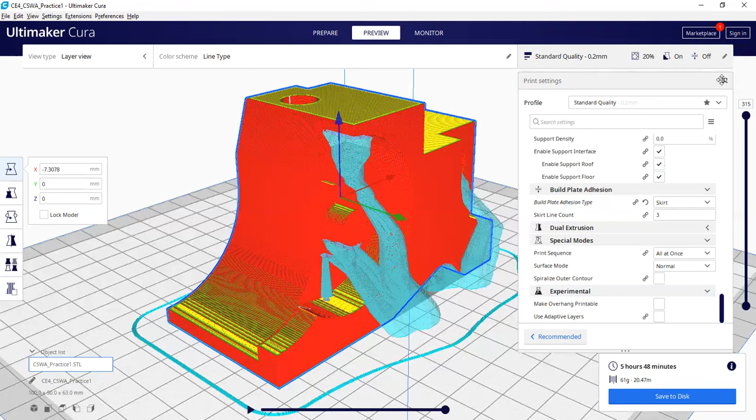And the main thing is, once you have your print set up, you have your settings adjusted, if you just need to print it, you just put it on, hit slice and print. You can just save it. If you grab the SD card and SD card reader from the printer, you can pop that into your USB and it will automatically allow you to save it to your removable drive.

You save to drive, you hit eject, you pull it out of your computer, pop it into the printer, and you can then just print it. The machine will do the rest of the work.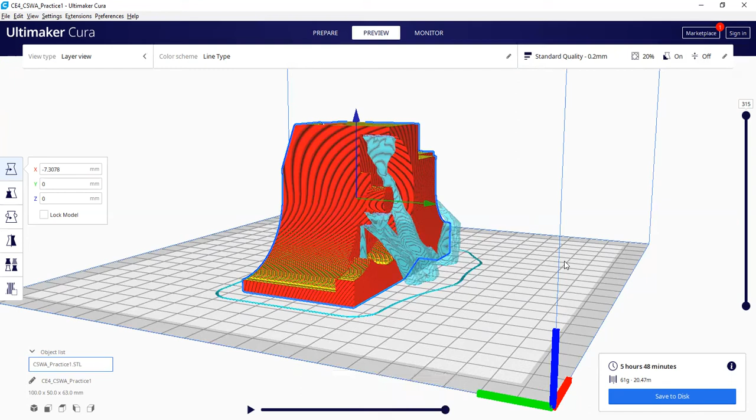From there, all you have to do is watch the first couple of layers, make sure that it's sticking down correctly, it's not pulling off the print surface, it's not under extruding, so it could be clogged or the extruder might not be gripping the filament correctly. In which case you just give it a little once over, see why. Is the bed not level? Is the bed dirty? Do I need to take the filament out, clip it, and put it back through? That kind of stuff.

Does anyone have any questions about the slicing?

Sorry about my internet issues. Hopefully you can all still hear me.

I skipped fuzzy skin because I didn't think it was that important. Also, it's an expert setting. They're in expert mode under experimental. You can turn on fuzzy skin, which will basically just shake the nozzle whenever it's drawing walls and give all your prints a very weird texture.

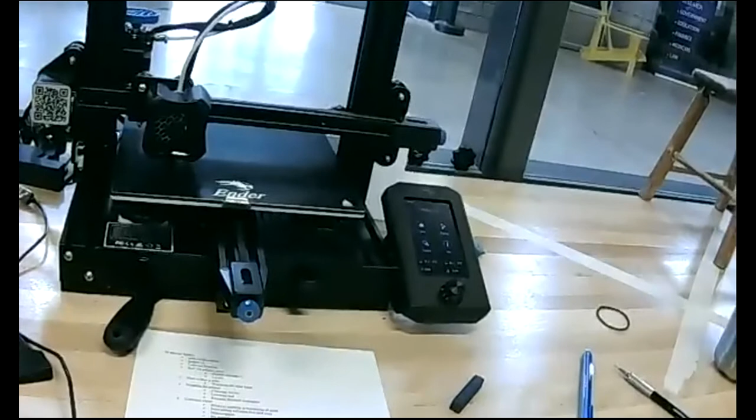What I can do right now is potentially go over how to change the filaments and how to just make sure it's not clogged. Okay, I'm gonna move my camera here and try and flip around. See if I can do this by hand. So right now we are desperately low on filament. Not desperately low, we have like 100 grams there or something. So we're gonna change the filament. This is also the general procedure when it comes to fixing your clog, which is basically just taking out filament.

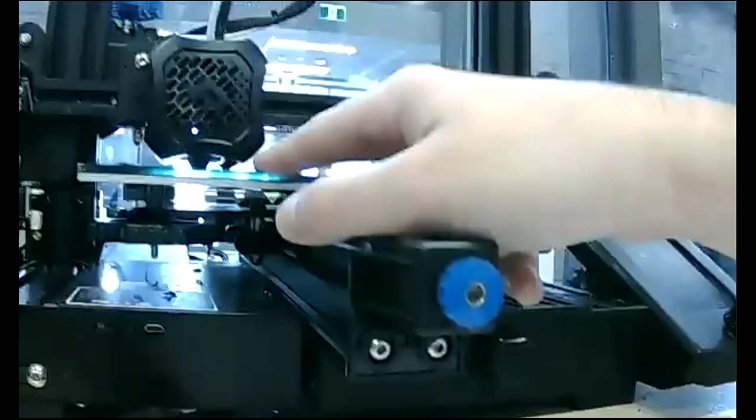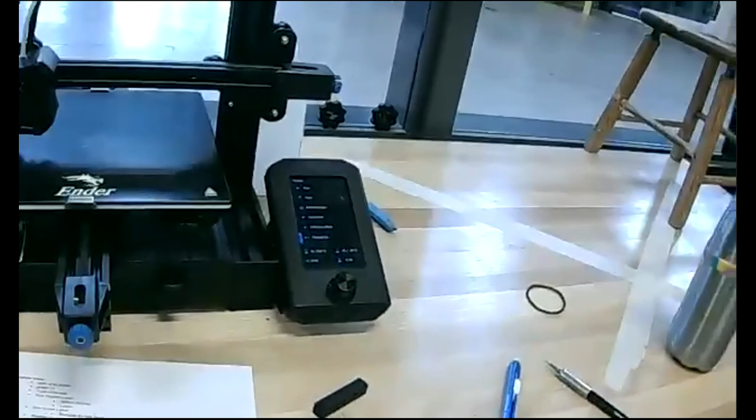First thing we need to do is heat up the hot end, but we don't want it that close to the bed when it's just sitting at 200 degrees, not doing anything. So I like to use the move option, then just pull the Z axis up, put it at 19. Now we can go to preheat PLA. And it's just going to start getting hot. Hopefully you can see, the target temperature is now 200 degrees Celsius, the current temperature 45, and then the bed temperature target is 60 degrees Celsius and it's at 27. So we just gotta wait for that to warm up right now.

Oh, one thing I forgot to mention earlier. As I stated, you can print multiple parts at once. A lot of prints that you find online will take advantage of this and allow you to print some pretty complex parts, like full ball bearings in place. So all the parts will be together and it'll print it all at once. But one thing that needs to be realized if you're designing something that's going to be printed all together, or you're printing multiple parts and jamming them into one space, is that it is hot plastic and there is tolerance on it. So it will all merge together into one part if your tolerance is not correct.

So our hot end has reached the desired temperature. So we're going to disable the stepper motors. And I'm going to take off this little handle here and get right in here. So this is your extruder motor. This gear here grips the plastic and forces it through. So we need to remove the tensioner, which is pushing the filament onto that. By pulling this back, we can pull that tensioner off of it and remove it.

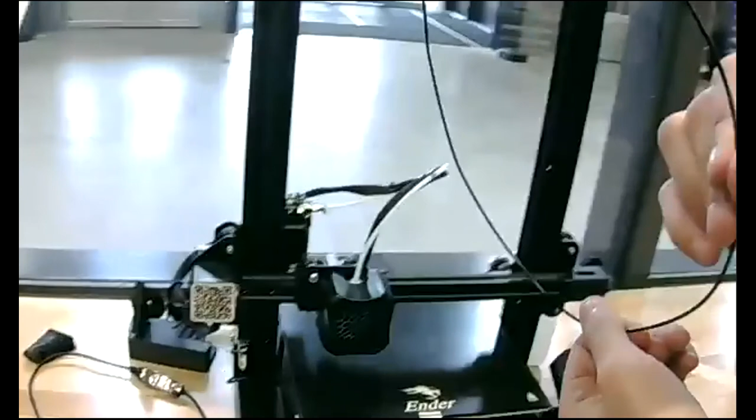And if we pull this back, we can now grab the filament with one hand and just give it a firm yank and pull it through the printer. That pulls it out of this Bowden tube, and you can see where it was melted inside of the hot end here. A lot of the time, if you have a clog, a lot of it will come out. And then you can use a small fine needle to actually poke through the hot end and the nozzle and make sure it's cleared out. So we're going to just pretend that this is a new spool of filament now, because we don't have another one to put in at the moment.

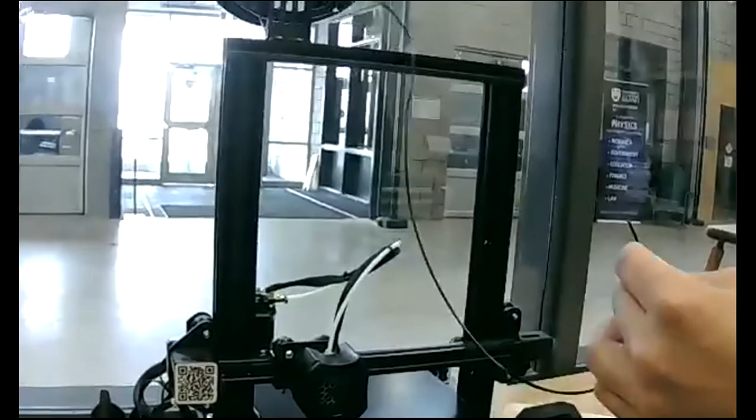So when you take your new spool of filament, you're going to load it onto the top. You're going to take the loose end out of it. You're going to snip it at as sharp of an angle as you can with the included flush cutters. These are your tool to remove all of your support material, or the most common tool. Once we have that, we come over here.

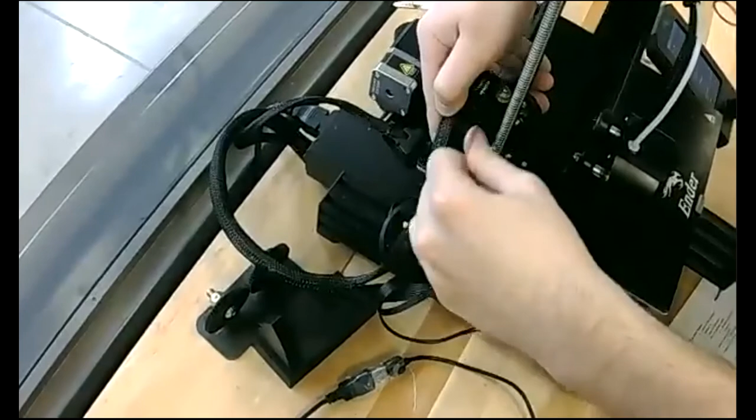There's a small hole right next to the Z screw. Your hand's kind of blocking it. Sorry. Yeah, there's a small hole. We're going to just force it through that hole, open up the tensioner again, and fight with it to try and get it through the other hole. Once we do that, we can force it. You can see it moving through the Bowden tube.

And once we get there, we'll put the little handle back on the extruder, and that will allow you to manually move the extruder. And we're going to force the plastic through it by extruding it. Down here, you can see plastic working its way out of the nozzle.

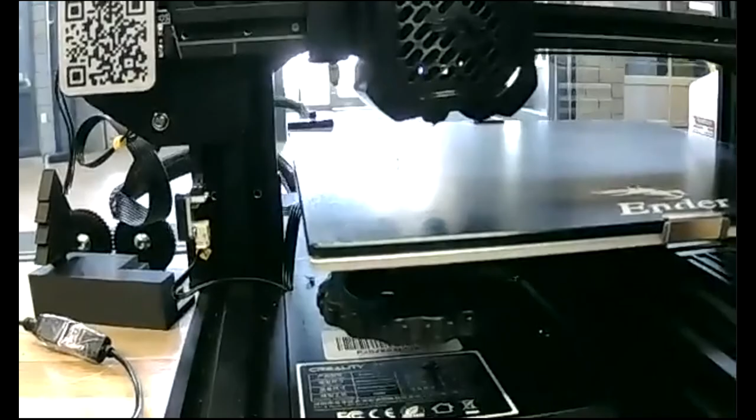And if you're changing colors, you obviously want that to happen until it is entirely the new color. Or if you're keeping it the same color, you want it to just extrude a good amount to make sure that there's no bubbles. And at that point, you can retract it a little bit, and you're good. You're ready to start printing again.

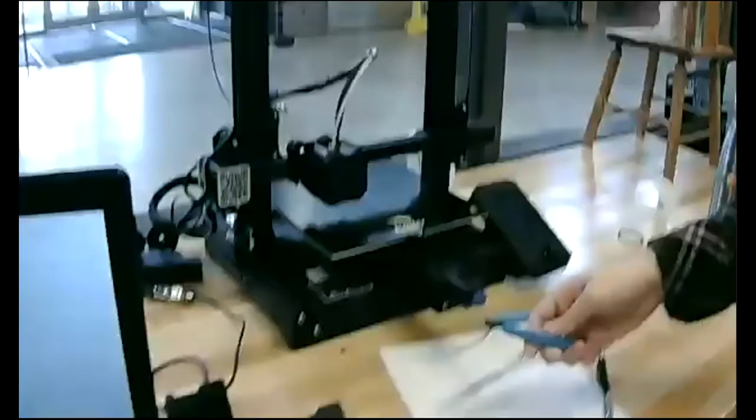Are there any questions on how to replace filaments? Okay. Jared, do you think there's anything that I missed with this? Or anyone else? No, I don't think so. Did you touch on belt tensions at all? I did not. That's a good idea. So I'll show you guys quickly.

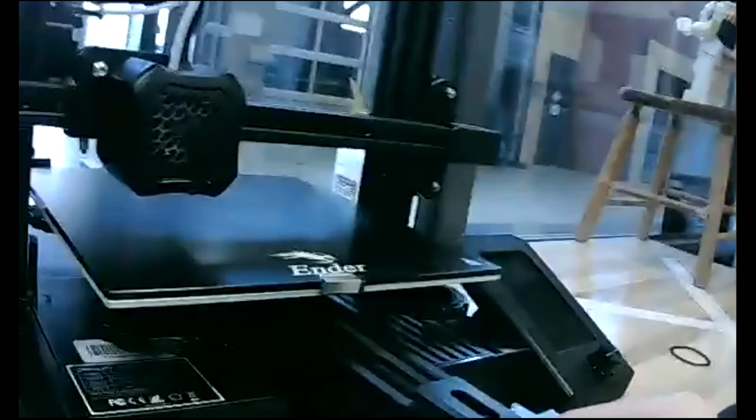So both your X and Y are driven on belts that go to the motors. This one's kind of hidden away inside the X bar there. These come with these tensioners on either side. So you might find that your prints are looking very sloppy. The layers don't always level, like they're not always in line with each other. One layer might be slightly overhanging on one side and the other layer on the other side. That's generally because your belts are too loose.

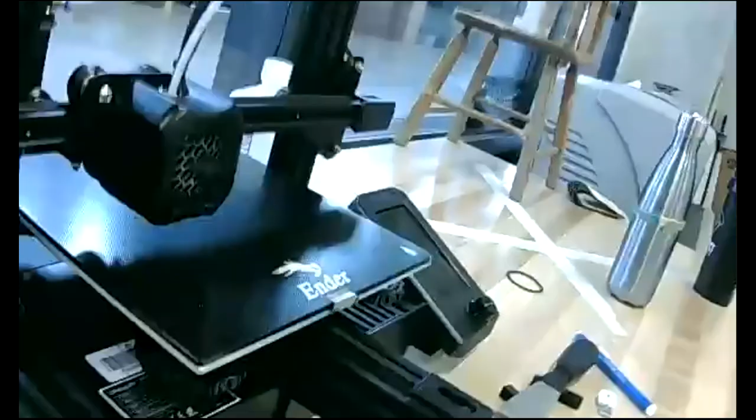Because it's going to move and then it's going to continue moving after it's supposed to have stopped. So if you keep a nice tight belt where you can almost kind of pluck it and it makes a noise, that's going to make sure that you don't get that sloppiness in your printing. That generally will just be an issue you'll see in like the XY will be off.

If you ever find that you're having issues where layers are getting too thick at certain points, like the layer lines aren't consistent, but it's not off to one side or the other at any point, it's the entire layer, it's probably because your Z screw is dirty, and that is this metal screw that the motor's attached to that forces it up. If this gets dirty, it might have a little trouble moving up and down, and that can cause your layers to be a little too thick.

Another two things would be the wheels, adjusting them. That shouldn't have to be done much, but it could. And then the stepper motor for the Z screw sometimes causes the screw itself to twist. And the Ender 3 version 2 is known for that. So Jeff has printed a couple brackets for his to keep them straighter, or you can put a bearing at the top to kind of hold it straighter so it doesn't cause misaligned layers.